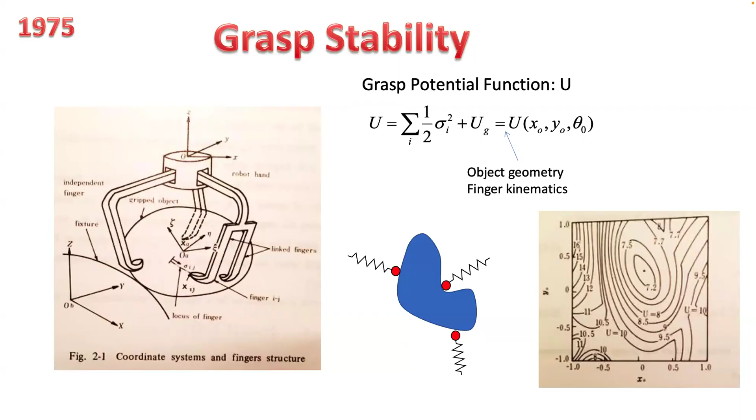If you plot the iso-potential curve, you see a nice local minimum. This is a stable grasping point, which gives a good insight into how we can actually quantify grasp stability. At that time, there was no good way of controlling the force or torque.

So I invented a way of doing that. This is the first series elastic actuator, having a coil spring between the actuator and the load. By measuring the deformation of the coil spring, we can get a pretty good force measurement.

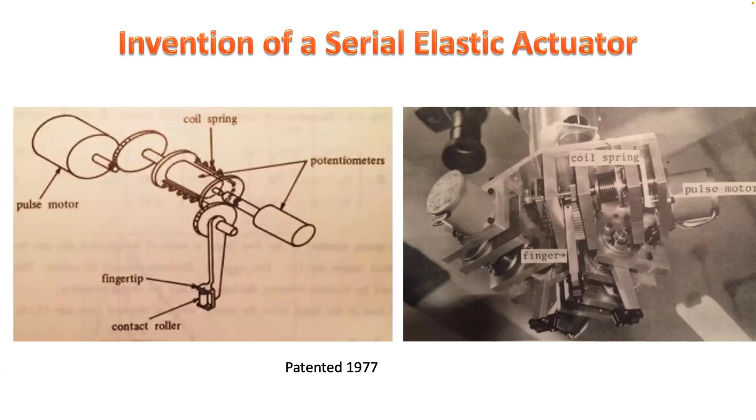After that, when I had the chance to move to the US and got a job as a postdoc at Carnegie Mellon, I found high torque motors just coming out, with rare earth magnets at 42 megagauss-oersted. Now there are much bigger ones, but I knew this was a big breakthrough, along with the high power MOSFETs just coming out.

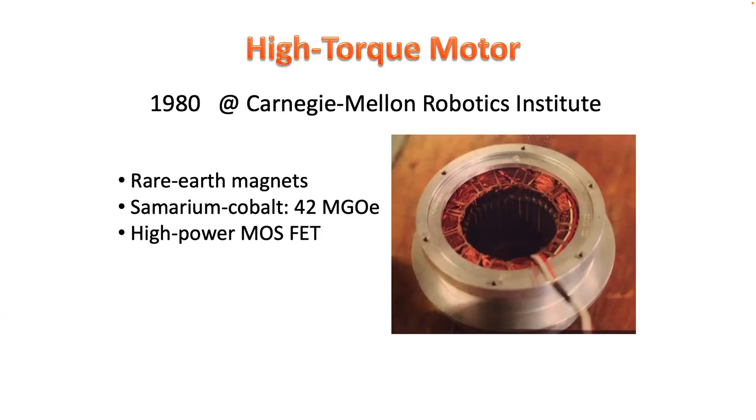These two allowed me to build a robot that has no gearing - the first direct drive robot, at Carnegie Mellon. It was commercialized nicely by Adept, and is still being used in clean room automation, handling wafers.

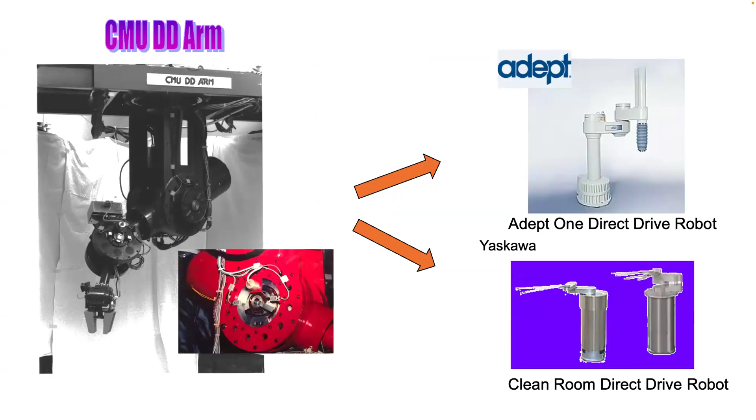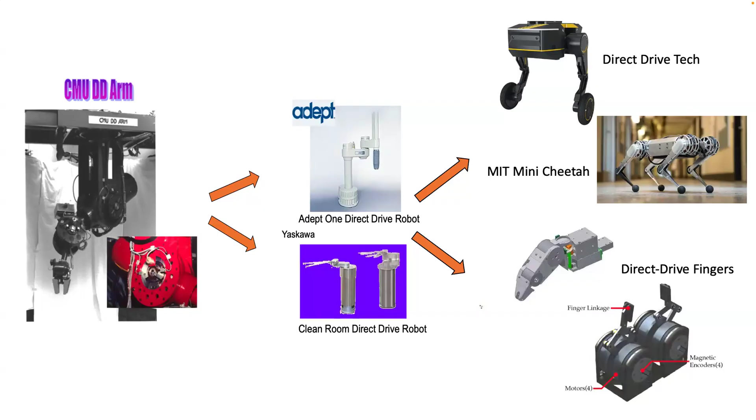Now there's renewed interest in direct drive, but combined with some low gear ratio, so semi-direct drive. The feature is that it's very clean and back-drivable, so you can handle negotiation with rough terrain very nicely.

Also, taking advantage of back-drivability, we can actually detect humans' skills. This is early work with imitation learning, because grabbing the direct drive robot lets you actually show your skills and demonstrate it.

We get the data - both the force and the position - and by analyzing the data, we extract the control algorithm behind that, and transfer it to the robot. People now call this imitation learning. But I think this is very important for me, because my original vision is that you need to understand what's happening, but it's hard to extract because we do this at the subconscious level - we never pay attention to it. So the best way is to observe, get the right measurements, and reveal control algorithms we've developed without knowing it, and use that. That's early work from '87.

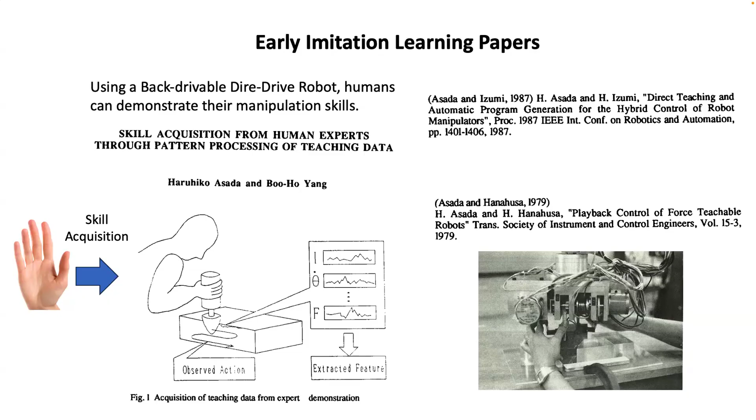Skill acquisition. Then 25 years later, robotics reached the point where it's dexterous enough to do something to help humans.

So I attach the robot to the human body, so you have a third arm or extra limbs on your body. The sponsor for this crazy work was Boeing, for the final assembly process of a big airplane. Most of the work is on ceilings or floors, and it's ergonomically very difficult to ask someone to do that every day, 9 to 5 - it's a hard problem. So maybe we can ask robots to help humans in doing this.

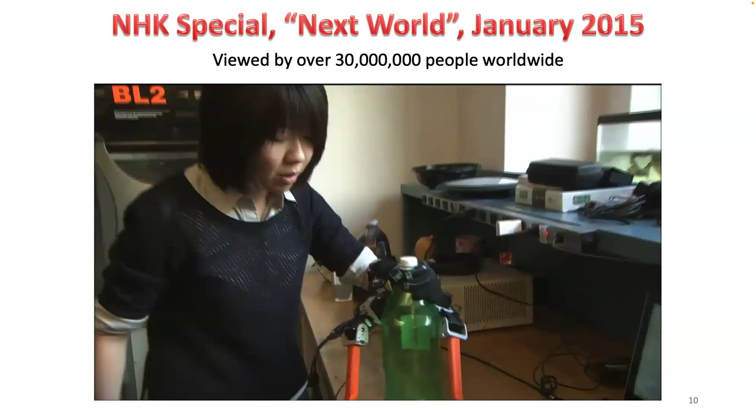Looking at your body, there are many places you can attach extra limbs. The goal is that if you can control it very well and know the human intention, the human perceives this extra limb as just an extension of their body - that is the ultimate human-robot interaction, which I've been dreaming about.

One of the best applications we found is space robotics - here the super limbs are attached to the astronaut's spacesuit. Once you wear the spacesuit, it's internally pressurized, so it's very stiff to bend. So even a very muscular, super athlete astronaut, once they wear that suit, has very limited actions.

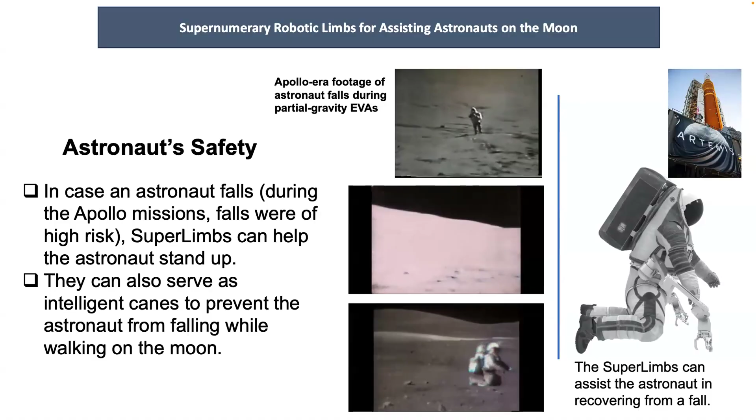In particular, they had to walk on the moon during the Apollo era, and they would all fall. Once you fall, it's harder to get up. So we proposed to NASA to attach extra limbs to assist astronauts in doing this kind of work. This is the newly developed robot arm - we published this recently.

Interestingly, studying the astronauts, we found a very similar problem in elder care. As people get older, their physical strength and bendable angles shrink, their eyesight gets narrower, and their balancing capability declines.

Elderly care is so important - elderly people everywhere underestimate the risk of falling, and then they fall. But also they overestimate the risk of falling, so they stop exercising, which increases balance problems, and then they fall. Either way, there are 37 million fall cases - 1 out of 4 US adults 65 years or older - this is a major issue. So we built a robot to assist with that kind of stuff.

This is a Tai Chi assist robot. We have to encourage them to take more exercise, but a safety net is needed. This robot has to move together with the Tai Chi, which is slow, so it's not difficult to support - that's something interesting we've done.

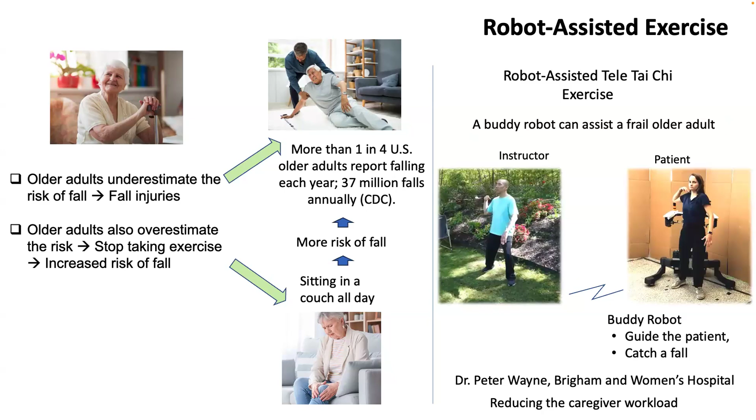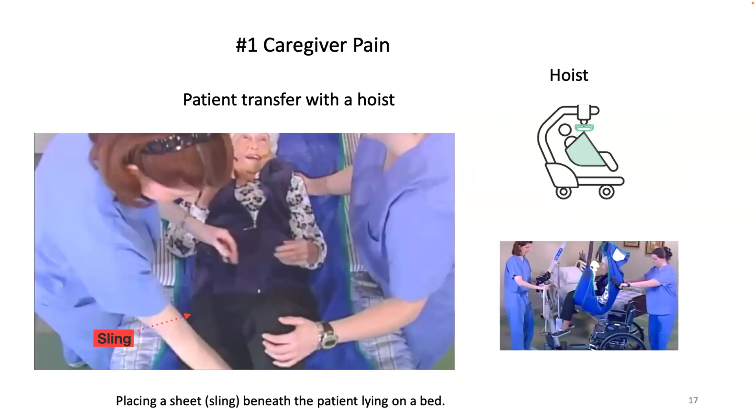Tai Chi saves caregivers' effort, but the hardest part, when you interview caregivers, is transferring the patient from bed to a wheelchair. This is hard because before, using this kind of cradle, you have to put in a sheet - and who's going to put the sheet? That's an enormous effort.

This is a collaborative job with Allison Okamura at Stanford. We built this kind of special robot that goes beneath the human body lying on the bed. Once you spread the sheet, it's easy to carry, and this one can extend in many directions.

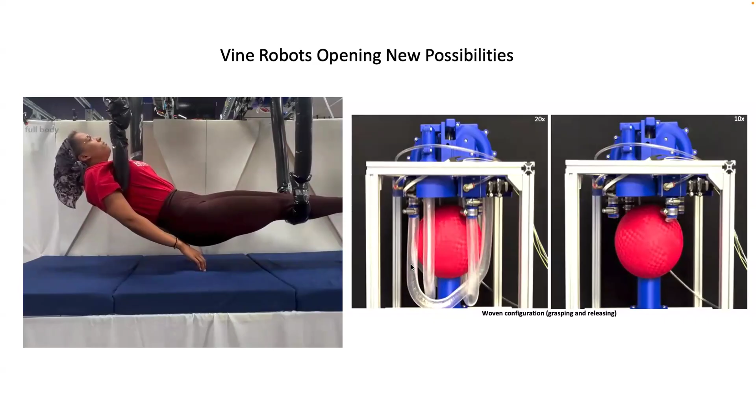So VineBots - I think Laura's somewhere there, actually - agreed with me that it's so flexible it can deal with very unusual types of grasping, and even a human can be lifted. It's quite powerful - that's what we've been working on.

Up to this point, I think I'm convincing you that robotics is quite rich. Any questions up to this point?

Are you okay doing this?

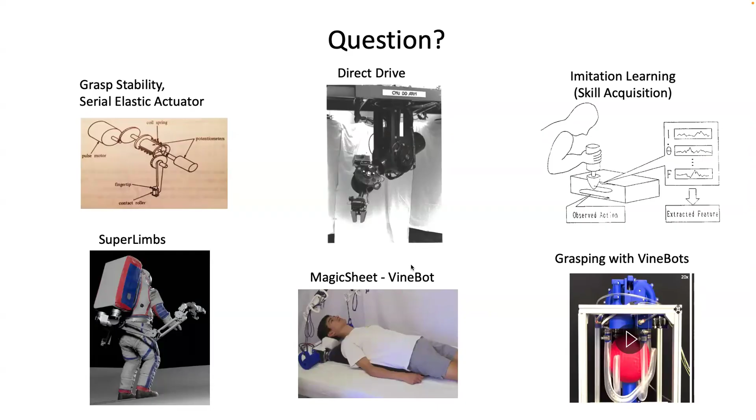Okay, let's move on. So the main topic today is actually not looking back, but it's 2026, and we have a big challenge from just the big data things. So I'm going to talk about the Koopman and global linearization. This may be a method.

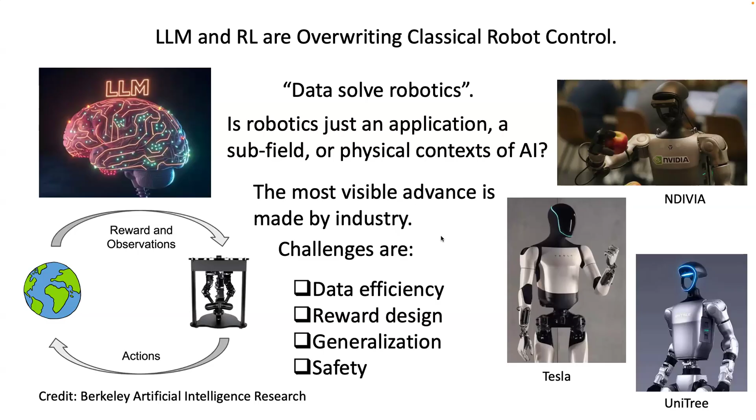I know it's a little hard to compete in the industry in that way. So let's think about a little bit actually bigger perspective. What comes out after this era, and that may be our role as in academia. So it said that this is the equation of motions and the assumption needed. But just using this mode of representation, treating the robotics in that way, may end up with some of the fundamental difficulties, and that's where we are now.

And also, as I just showed, the neural net-based representation too, having some kind of difficulty, and then things are very much brute force methods in many ways. Although it shows very flashy videos, in fact, it is very much improved. Very fascinating things are happening. Maybe it's time to think about the third method, at the representation level.

This guy is the differential algebra-based method, neural net based method. The third method I like to talk about is composition operator-based representation. And in the history of control, once the control community gained a new representation method, like state space, boom, there's so many actually big findings created. So it may be worth doing to find something different representations.

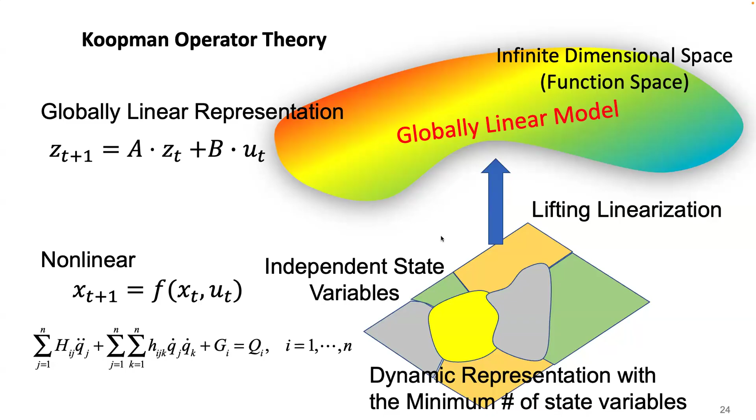Also interesting to note is that in many cases in robotics, we have to deal with switched systems. Some dynamic equations work only in this region. Once it's going to other regions, we have to use a different one. But using the Koopman operator theory carefully, we can actually get a unified representation that's applied across the whole segmented regions, and get one equation that applies to the whole space.

So this particular part is most important to me because the hard robotics problem is in many ways connected to the switching nature or hybrid nature of the dynamics, right? Because the robot actually interacts with the environment. So having a contact here, the dynamics of my arm is different from just moving it through the air, or walking, then one leg - contact situation, it's an open kinematic chain. Once you put the next leg, it just goes to a closed kinematic chain to some fundamental changes in your dynamic equations occurring at this point.

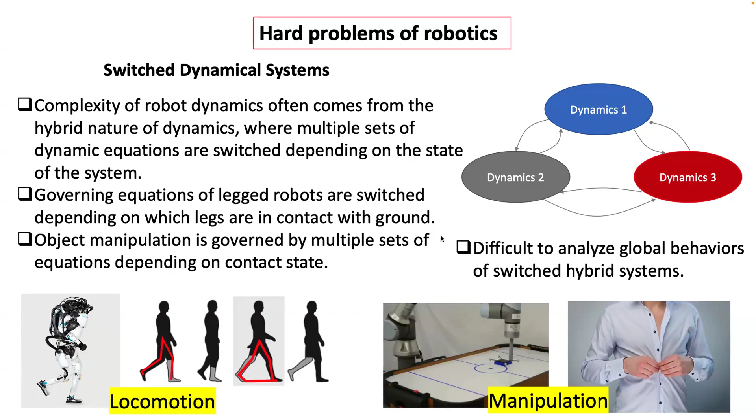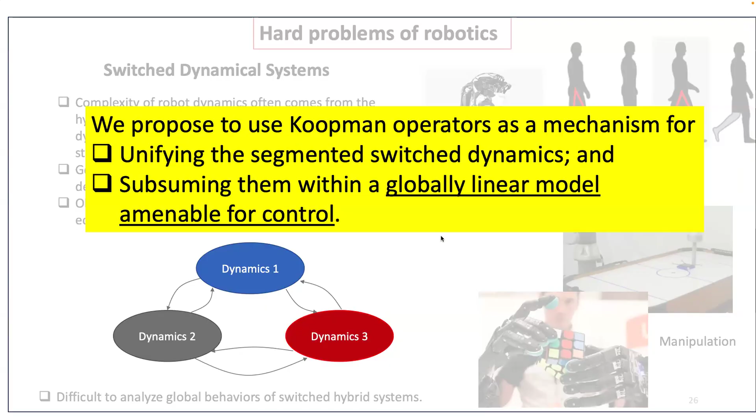So how can we actually deal with such challenging switched systems in a unified way? That's a very important point. So we propose to actually use the Koopman operator as a mechanism for unifying otherwise segmented, switched dynamical systems, subsuming many different dynamics into a globally linear model, which is of course amenable for control. So that's the goal. Actually, switched systems, hybrid systems, having so many research works.

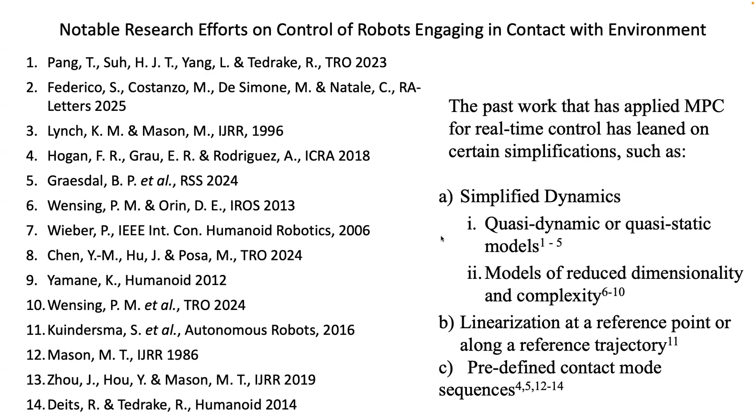This is only in the robotics community - so many great works have been done, I know. However, this is really a hard problem. So they have to take some kind of simplifications - dealing with quasi-dynamic or quasi-static models, or reduced dimensionality and complexity, or linearization at the reference trajectory or point, or a predefined contact mode sequence that is assumed. I'd like to remove all these things and then create a new methodology in representation based on the Koopman operator.

So we focus on the switched dynamical systems, and then we make adjustments to the original Koopman theory, so that you get Koopman compatible physical models. In doing so, we had to deal with discontinuity and causality issues. The original system is not applicable to control systems, so we have to make it control coherent. Once you get the linear model, we apply linear MPC, which is a convex optimization, but very quick to compute, and applies to a variety of applications as listed here.

Even just looking at the simple sit-to-stand motion, a human actually switches between at least 3 or 4 different modes. At the end, we stand up and stabilize the system, which is actually a feedback controller. Before reaching there, it has to go through different modes. But you never notice the switching of your controls. There may be some different way internally of building the model and perceiving the balancing stuff, so we'd like to discover something beyond that.

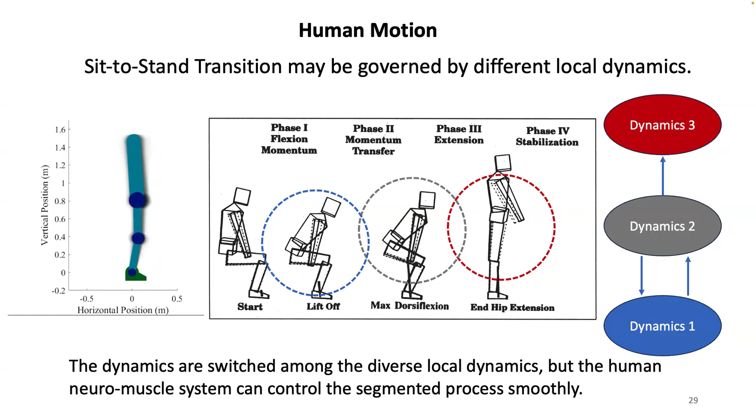So I'd like to just introduce Koopman theory for folks standing there who haven't studied that. I gave my students this as Bernard Koopman's original paper, vintage 1931, and they don't understand it. It says a nonlinear autonomous system can be represented as a linear dynamical system in an infinite dimensional space, and only high priests understand that, but normal people don't.

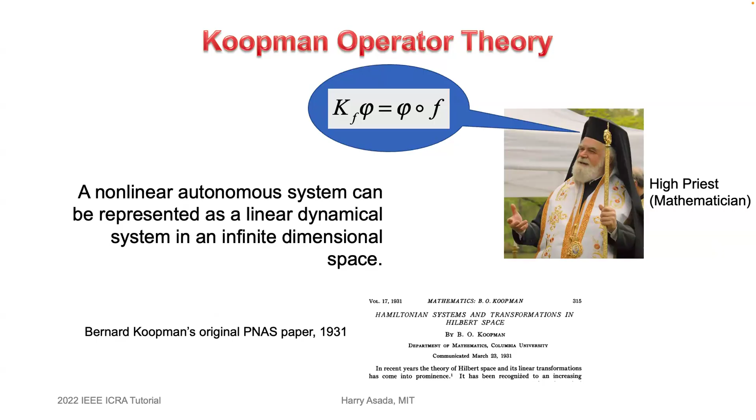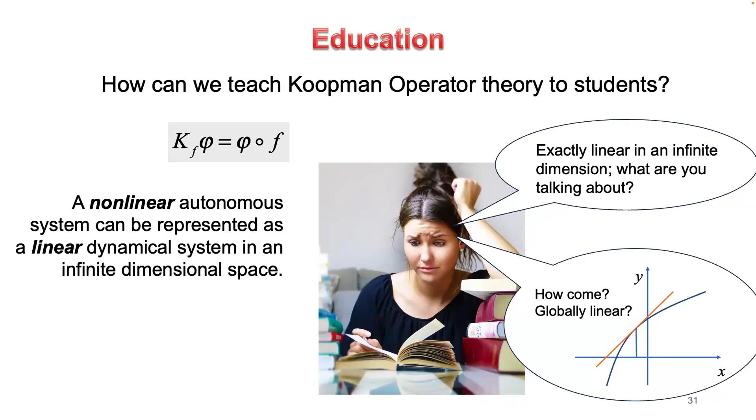So students asked, how come it's globally linear when linearization is just picking a point and drawing a straight line, so it's valid only in the vicinity, right here? So exact linear in infinite dimension - what are you talking about? So they are not happy. I just make a big smile so everyone understands. That's a quick 2 or 3 minute introduction that is simple to understand.

So we start with the autonomous system, no control, a nonlinear dynamical system in discrete time. The state xt is an n-dimensional state variable, dimensionally mapped to xt plus 1.

Now for this we consider orthonormal basis functions, phi i. We need an infinite number of basis functions that span the whole Hilbert space. Consider the composition of this basis function with the dynamic equation f, self-map F - we replace xt by f(xt), which is on the same dimension, putting it here. This means the composition of these two functions is written as phi small circle F composed with the functions of xt. If this composition of functions is involved in the Hilbert space, then this function can be expanded into a series of orthonormal basis functions.

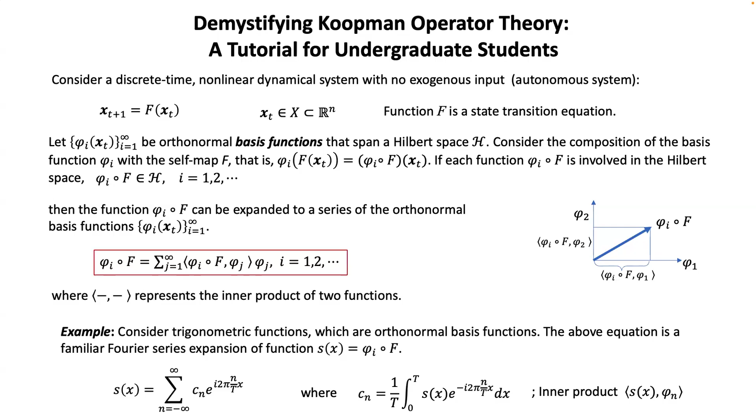The simplest example is trigonometric functions, and it turns out to be simple Fourier series expansion. So you have some function S(x) that is expanded through a series of sine, cosine, or exponential functions. Cn is a coefficient which can be represented as an inner product.

Now the trick is this - this is the equation I showed you. This function can be expanded into this form, so these are basis functions, and we have an infinite number of them. Let's put this into an infinite dimensional vector, phi1, phi2, creating this kind of vector. This vector is multiplied by this coefficient, which after computation is just one coefficient. Let's put it as Aij.

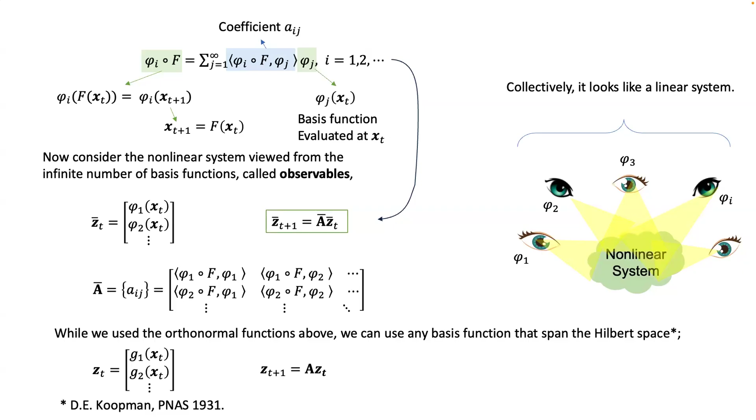I just use the orthonormal basis function, but phi i can be extended to just a general basis function that spans the Hilbert space. We get this as a simple extension. We get this expression, and zi is basically these observations. We call it observable. An infinite number of observables can be placed in this way.

Now, so that is the case where we have no control. The original Koopman theory applies perfectly. However, our interest is to put control here. And then actually the original Koopman theory is not applicable to the control system. So what's the point? It's not applicable.

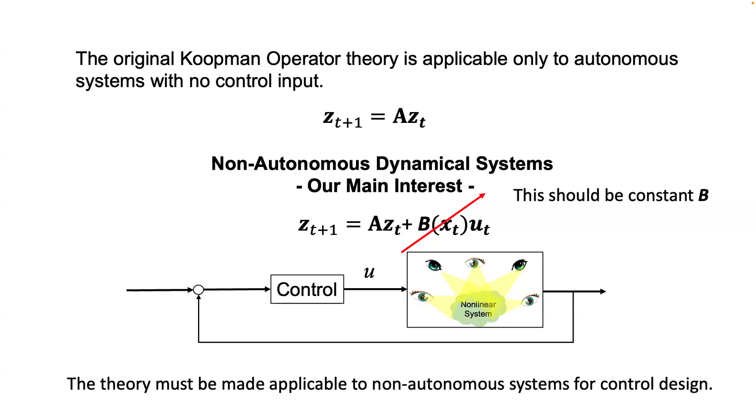However, this is one we extended recently, so that this particular part is actually a constant B matrix times UT. Otherwise, it's mostly a state-dependent B matrix, which is not so friendly in control design. So this is one extension we have made, and the trick is very simple.

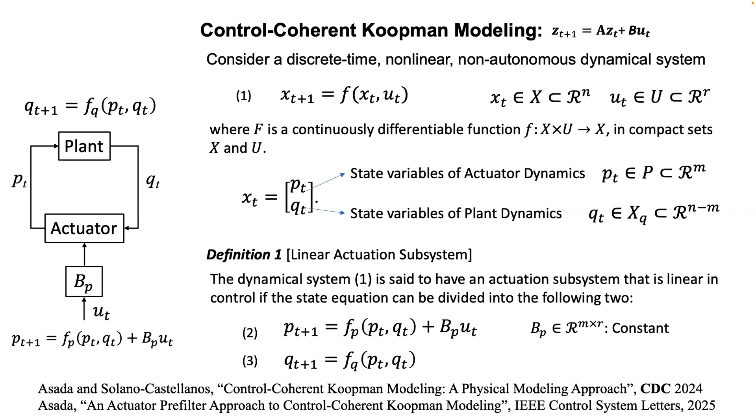All that part is nonlinear. The Qt is actually a plant state, and that's a highly nonlinear part. And here too, it's nonlinear. But as far as this guy is involved linearly, we can actually reduce that one into the Koopman form. So this is the outcome we can get, and the B is actually represented by this.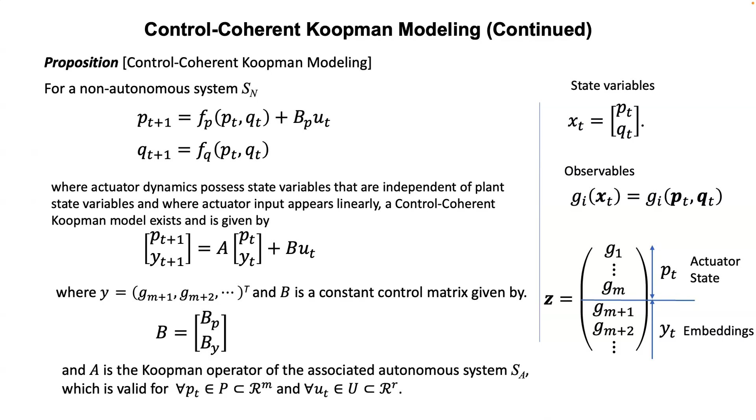So obviously, if you have this kind of structure, you can superimpose this guy in some way. So first you forget about this, you look at only this part. And then this is nothing but just a standard Koopman operator program. You create the Koopman operator for this, and then basically superpose this one into that. Well, that is something easy we can find.

So P bar, Y bar basically includes all the observable functions, and after this, after P, you get the standard Koopman operator. Now, one issue is that...

P plus one, this is without actually control, so we can add the control into this part. But maybe another very subtle point is that Y is also a function of P and Q, and then this Y bar is actually the original P, which is used in the autonomous system that doesn't have the control input in it. So there's a kind of gap between YT plus one, which we want, versus this guy. And then here the YT plus one, we have to modify PT plus one with some new input that comes in. So we need some kind of corrections we have to make.

Assuming that the time step is small enough and the original system is continuous, we can actually approximate this. So beyond this point is approximation. Approximate this to this form. So delta P is nothing but actuator dynamics with and without control input. So the difference is the control input. So nicely, this times this is actually linear.

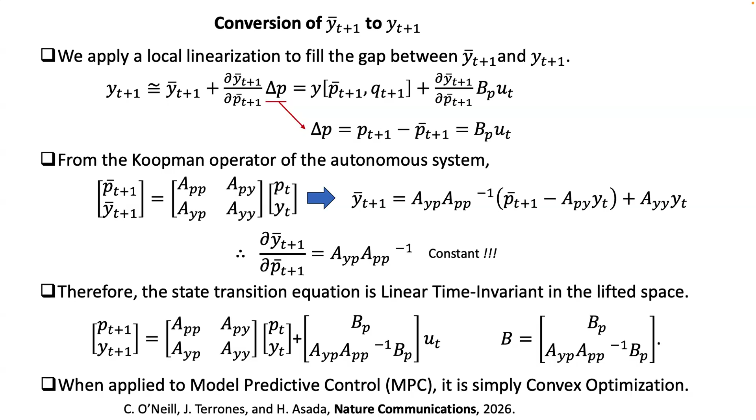This guy has complete derivations, extensions of the Koopman theory, two linear time invariant systems. We call this control coherent Koopman operators.

We found this particular form can be applied to many systems having a little bit of gearing compliance, like harmonic drives, where the actuator side state and load side state possess independent state variables. Same thing applies to hydraulic systems and biomechanical muscle systems having some compliance in it. Even if you don't have any compliance, like a very rigid system, we can create such compliance through some filter. This is the pre-filtering approach we just published.

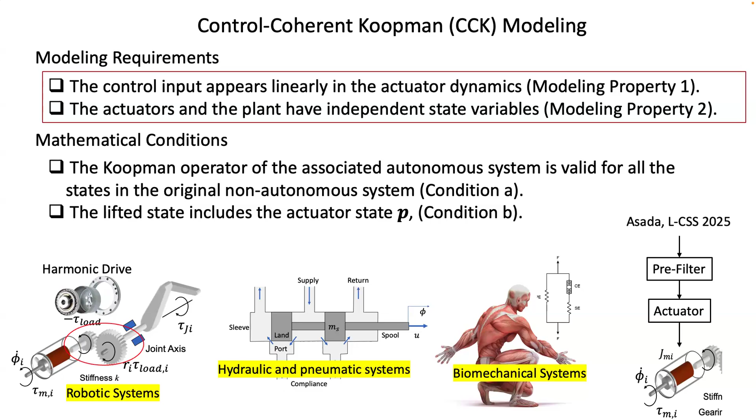This one has no constraint in it, so this approach can be applied broadly to a large area. You have to check that the control input appears linearly in the actuation dynamics - that's the first property. Then actuators and the plant dynamics must have independent state variables. So these are the things we have to do.

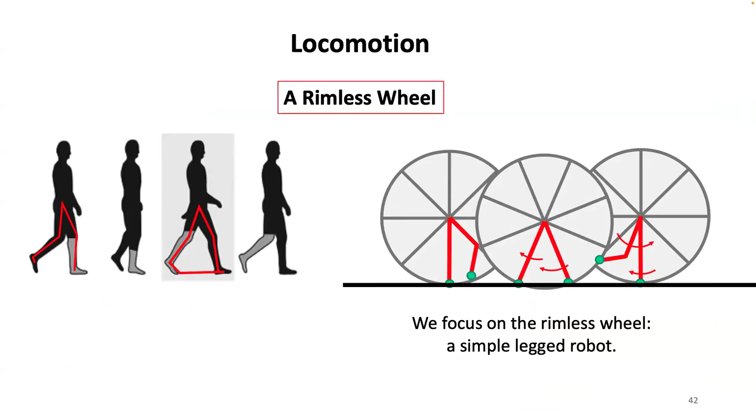Now let's apply this to some specific areas of application. The first one is a rimless wheel - this is the simplest model of human gait. So you have the hub of this rimless wheel. We built a kind of rimless wheel with 6 spokes, and each limb's length of the bodies has actuators. To locate this, we need 3 generalized coordinates: x, y, theta. Also 6 independent generalized coordinates are needed for spoke lengths.

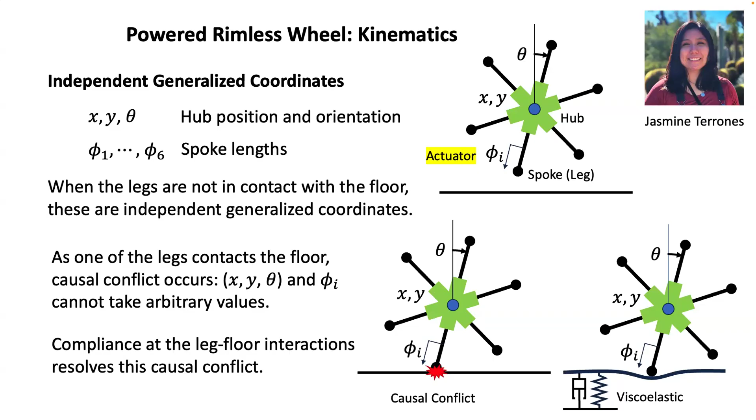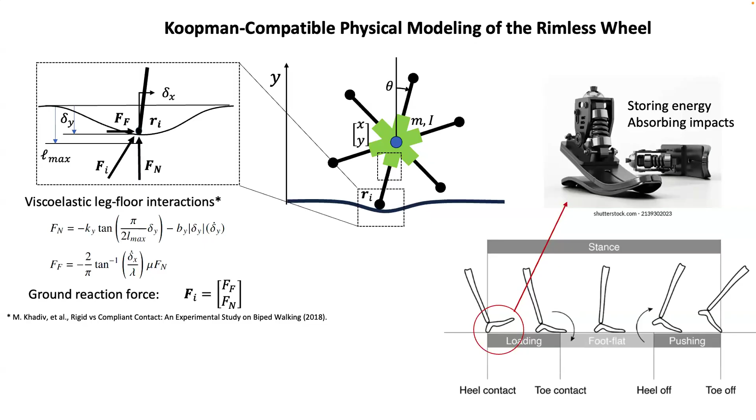However, once this one is in contact with the floor, a causal conflict occurs - x, y, theta versus these are not actually independent. So we have a causal conflict. To resolve that, we can consider some viscoelasticity on the floor, and this is natural in many cases, like gait robotics, which actually builds many complex models of viscoelasticity. We pick just one of them. We can say some limbs have this compliance intentionally to improve performance.

Once we have actuators, having some simple stuff like a linear actuator, look at this dynamic equation. It has the motor rotor inertia, and they're basically constant inertia - I wrote it here, IM is the effective inertia around the motor axis. This dynamics is highly nonlinear, but the input U created by torque is linearly involved in this dynamic equation, meeting the requirement I said - state variables independent, and input linearly involved.

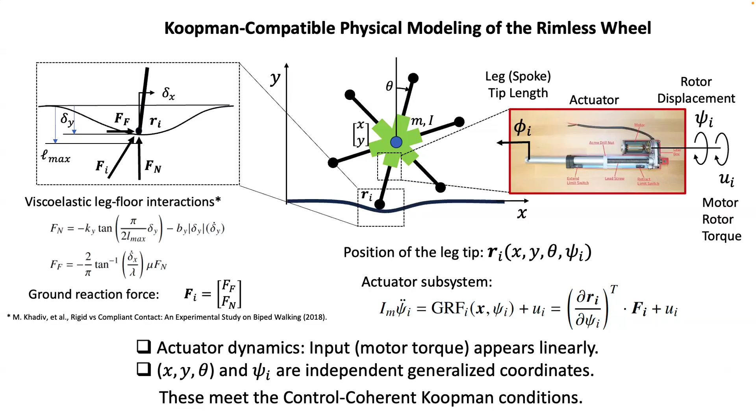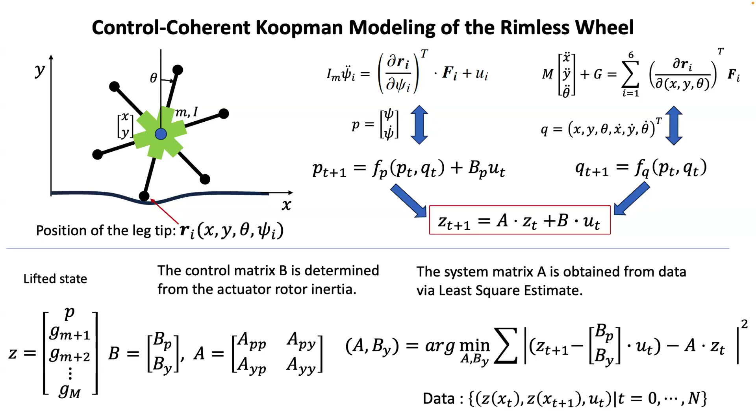So we can apply the Koopman operator theory to this. Once you have it, you can get the linear model, and matrix A is determined from the associated no-control autonomous system models. You can use the data-driven method or model-based method or whatever, and then B can be determined from this, or using this you can determine it analytically. So that is the case.

Now that we get the linear model, we apply MPC - this is the control index subjected to the linear model over here. So we can guarantee a convex optimization with fast computation in real time. The good thing here is, as I said, this is a switched system: one leg is airborne, then one leg is in contact, and instantaneously two legs are in contact, so dynamics must be switched.

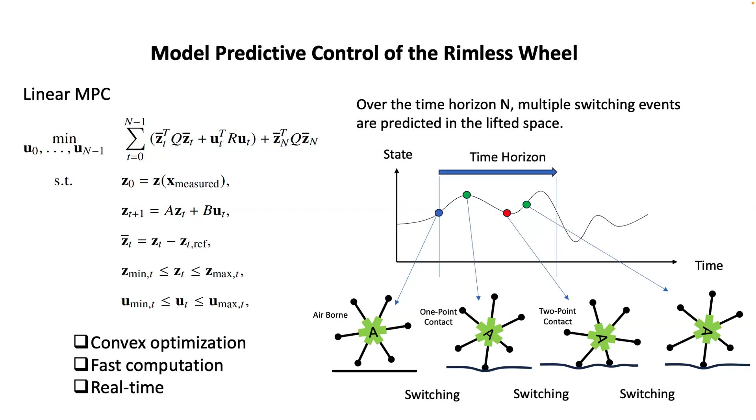However, the Koopman model includes all of these cases in one model. Looking at the time horizon, sometimes it's airborne, but now 1 point of contact, 2 points of contact, 1 point of contact again - this Koopman operator basically looks at the whole switching sequence down the line. So this is some simulation done by my students.

So this rimless wheel found some way of moving forward. And interestingly, before touching down, it contracts, so it bends more, and then pushes harder to get more traction moving forward.

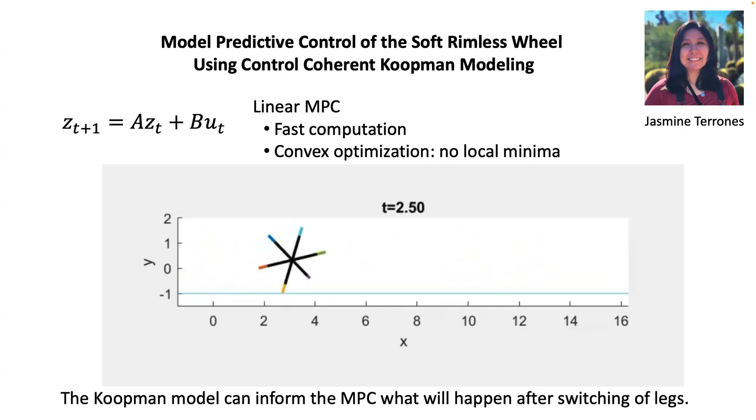And I have to emphasize that it can get global linearization. The region is divided into 3 regions: airborne/no contact, 1 point of contact, 2 points of contact, and the switching is very tricky. But see the current state over here - it's very close to this border. In a traditional model, if you use the traditional approach, it has no clue about what's happening after crossing the border. If you take the Taylor expansion at this point, there's no information about that point beyond it.

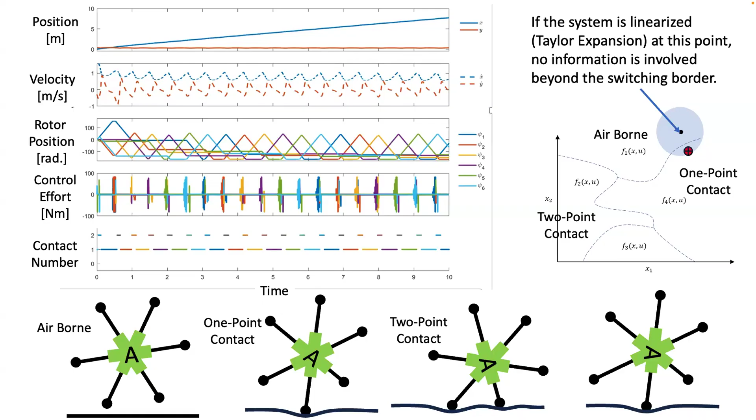Koopman basically takes the whole information in high dimensional space, so it covers all the stuff nicely. Of course, this means you have to have a certain time horizon to cover, and if the time horizon is very short, it doesn't work well. So as shown here, this guy is struggling and can't actually move forward. With 10 time steps it's sometimes okay, but sometimes it comes back and isn't very reliable.

Extended to 20 time steps forward, it goes very stably. So it does actually need a far-reaching point of view, and after many multiple steps later, where is it going? That's actually needed.

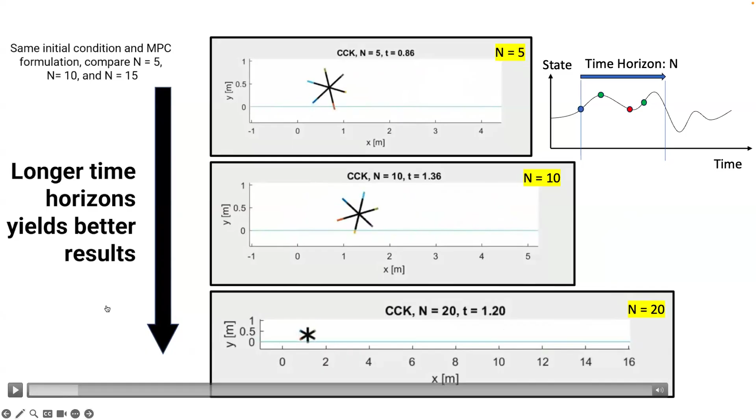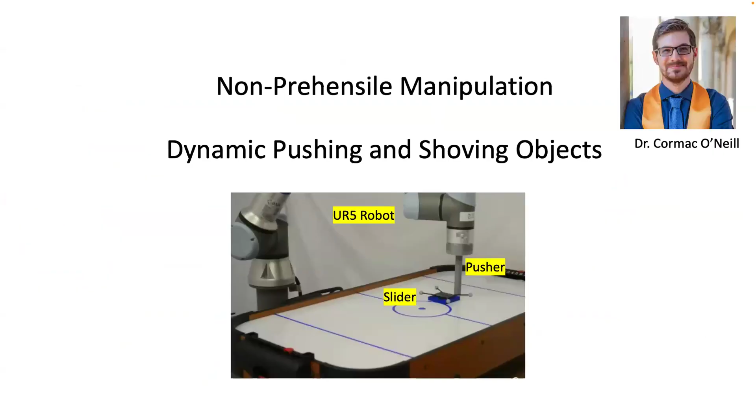So yeah, that's this rimless wheel story. Even more interesting is this dynamic pushing and then shoving. This is a very good classical award-winning paper by my former colleague Alberto Rodriguez.

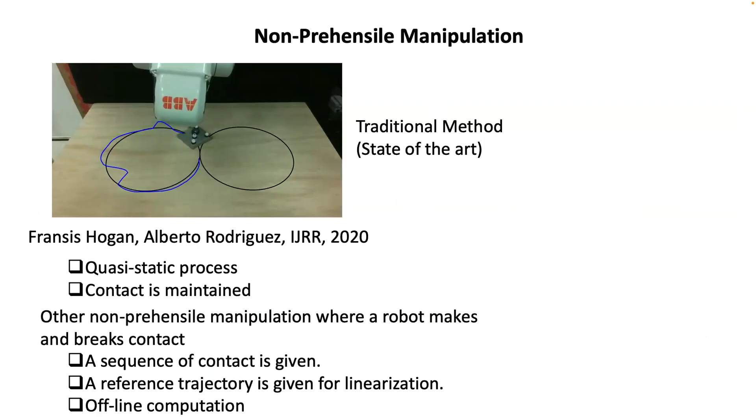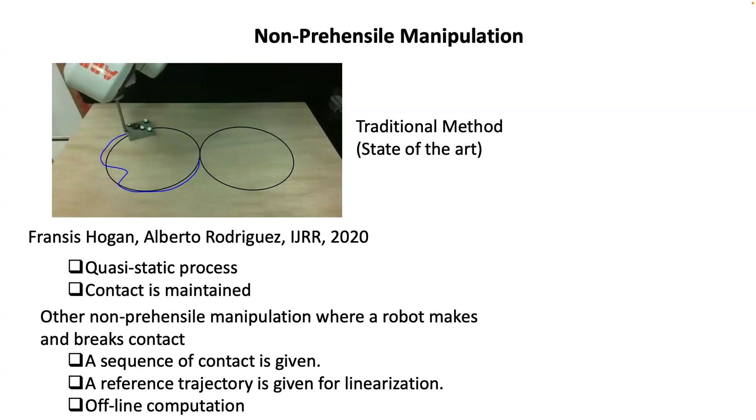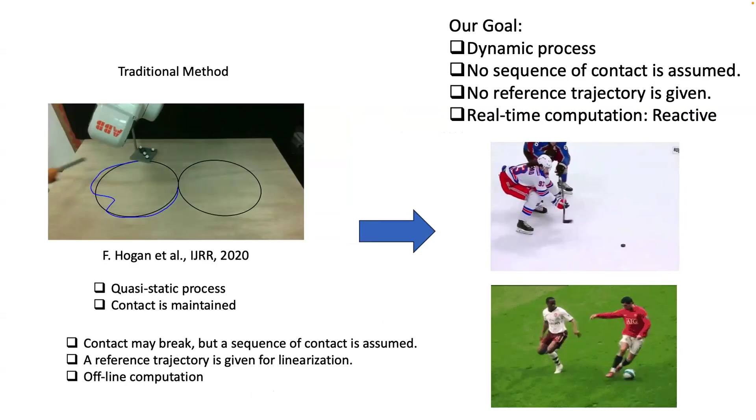It basically makes this pushing control assuming the quasi-static, contact is maintained all the time, with more restricted constraints. But this is what we like to do, right? Like so, the process is fully dynamic, no sequence of contact is assumed, and no reference trajectory is given. It's reactive and real-time computation.

Now look at this slider, the puck. We need six-dimensional state variables, X, Y, and the rotations. These two we want to make independent. Well, when they're not in contact, that's okay, but in contact it's basically conflict occurred. So we introduce some compliance, some pusher compliance into this. With this we clarify the requirement for Koopman operators, and then we build this model.

And then for actually finding the observable functions, we use a neural net. This is now the standard technique in the Koopman community, and we use that and put it into this robot.

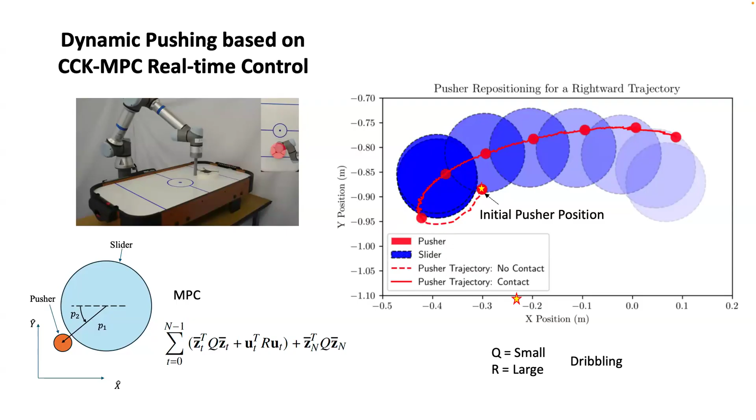Here's the puck, a circular puck. Originally the pusher is on this side. We like to move the puck to the other side. So first, the MPC has to think about it, change the contact point, move around here, then contact here, and move along this trajectory to move the object to this point by minimizing the cost functional. This is the case here where Q is relatively small and R is relatively large.

Now, interestingly, this is really reactive. So if you disturb it, it can actually make quick corrections and drive it to the target point very nicely, with no predefined contact sequence, no quasi-static assumption, all planning at real time.

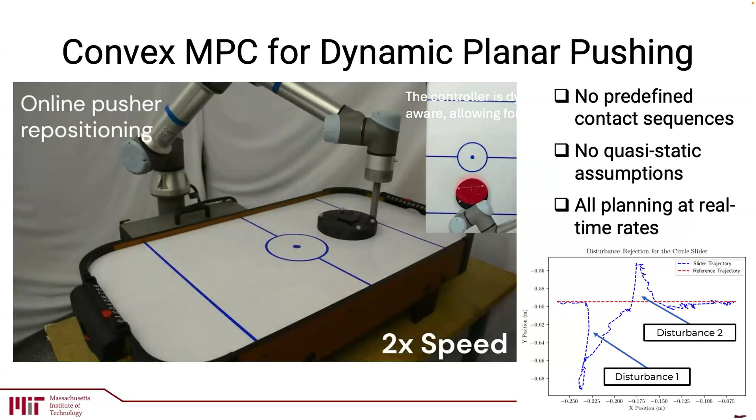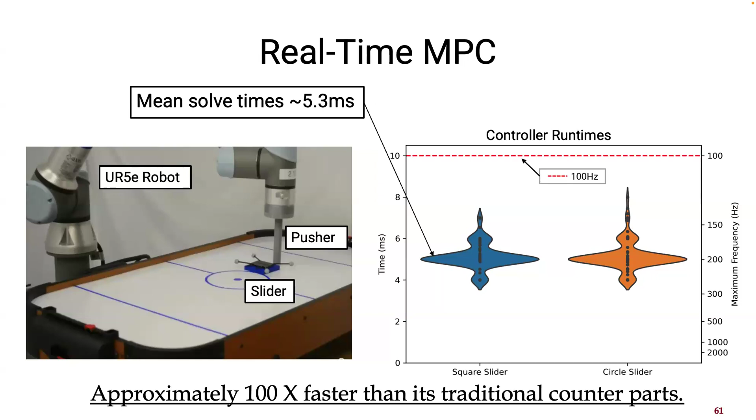Now, this is actually our measurement of controller run times. It's less than 10 milliseconds. 100 hertz is achieved, on average only 5.3 milliseconds. If you compare this to the traditional method, basically mixed integer nonlinear programming, that takes almost 100 times longer. So a drastic reduction has been achieved with this.

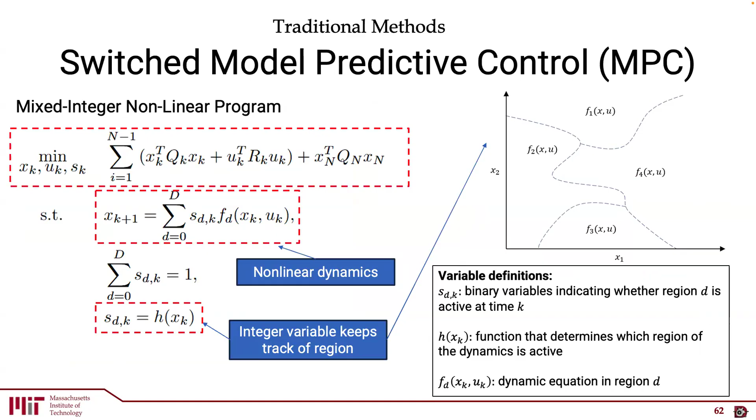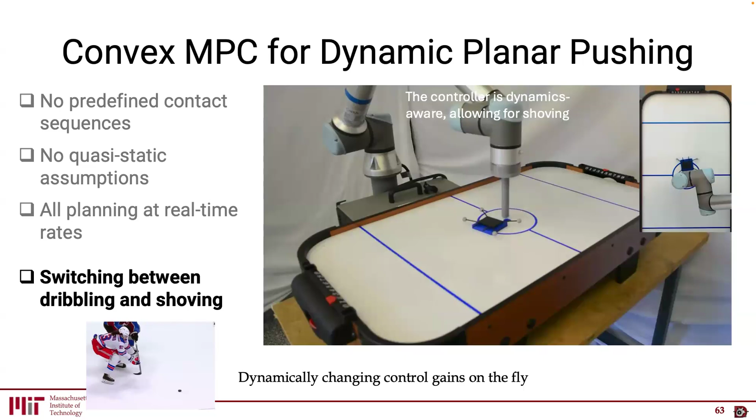Even more exciting to me is the kind of switching between control modes, dribbling and shoving. Just a small change to the performance index, the R and Q matrices, and the system can find the appropriate actions on the fly.

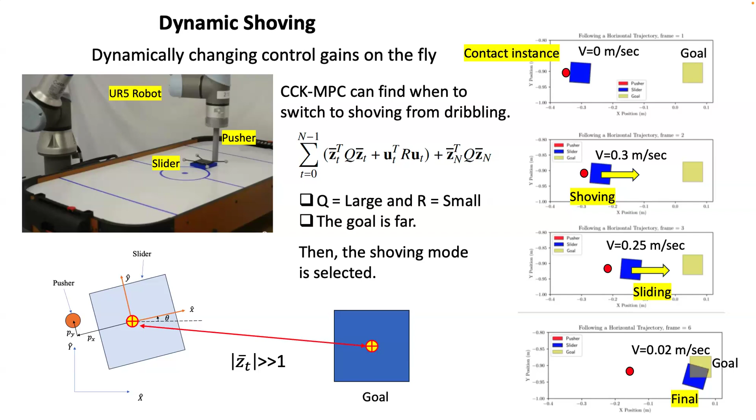So this is a case where Q is slightly larger and R is small, so larger control effort is allowed. Then what happens is when the robot sees the goal is far, instead of dribbling the object, it does a kick shot. We didn't do anything but just change the control policy a little bit, and it's seamlessly implemented and executed here.

In the parameter study, a few parameters are very important, and usually Koopman is very sensitive to parameters. The coefficient of friction is one of the most important parameters. If that's correctly estimated, you get very nice dribbling, boom, boom, boom. And if it's wrongly estimated, the real friction is much lower than the estimated one.

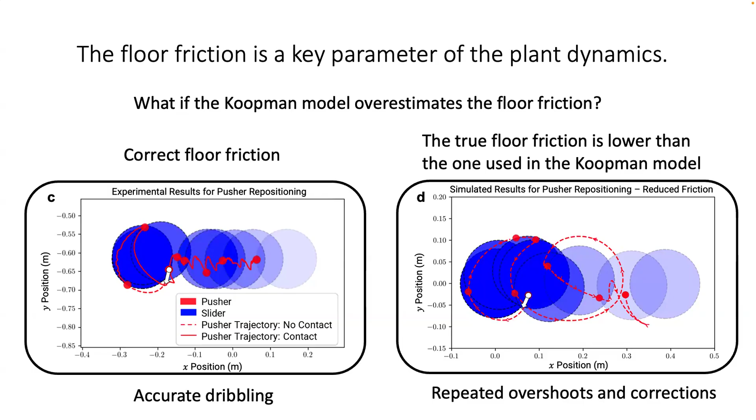It will overshoot and go this way and this way, but because of the feedback, it can actually handle this. Now, it is nice to incorporate the friction into this, right?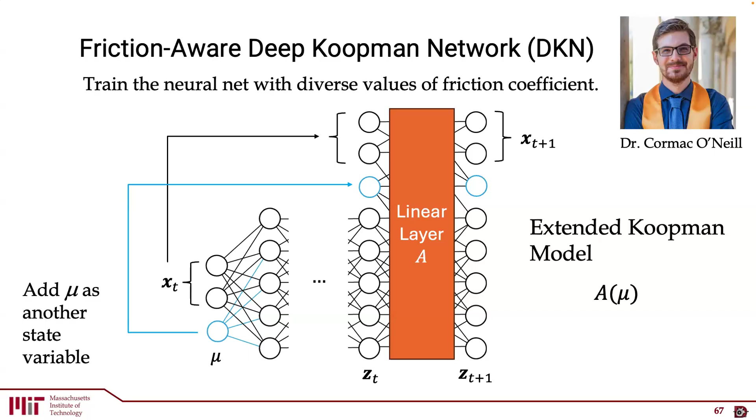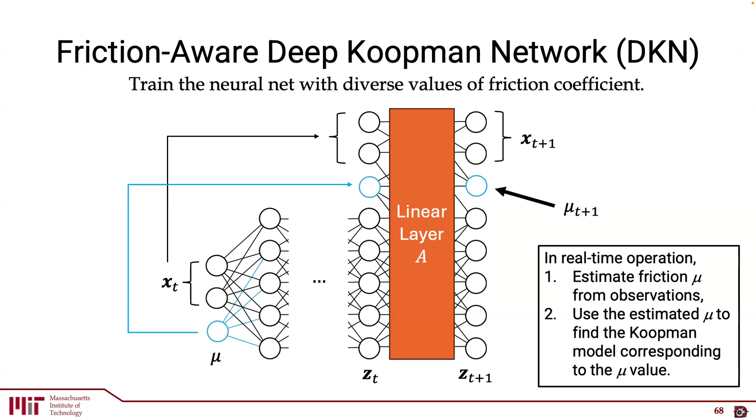So extending this original neural net to represent the basis functions, we talk about observables that can be found using the neural net based on some data. Now, training this, we can put the friction into this additional state of the input and train this, so this neural net knows all the cases for different values of friction. Then in real time, we can estimate the friction value from the real data on the fly, put the estimated value in here, and extract the linear model corresponding to that friction. That makes it much more accurate.

Maybe one of you would ask: what if we put some compliance here, if the pusher stiffness is higher? Maybe I'm cheating a little bit by putting in some compliance. So it's a valid question, what happens there? What if the pusher is very stiff? Does it impact the Koopman prediction accuracy? Yes.

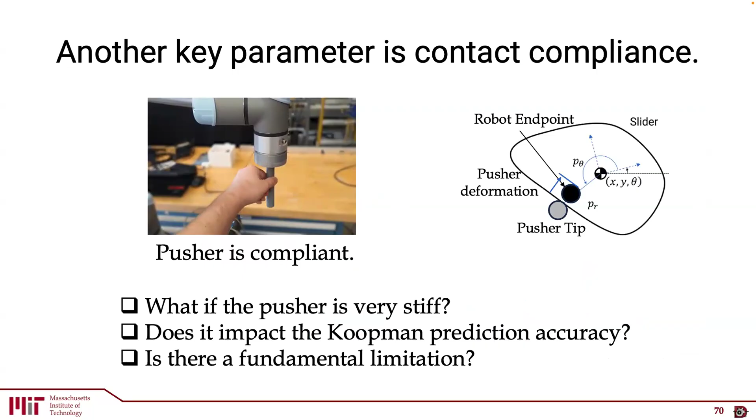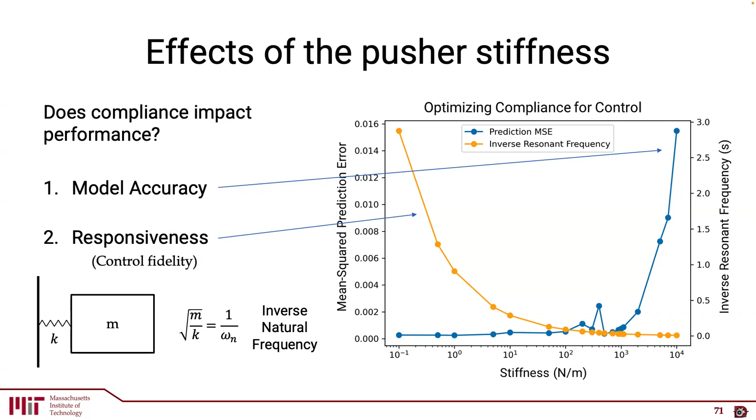So it doesn't work very well at high stiffness. At the same time, if the compliance stiffness is extremely low, that means the system is not really high fidelity control - you have to move a lot to generate the force. So controllability is basically going down, represented by this orange line. The smaller is better, so there's some kind of sweet spot somewhere in between.

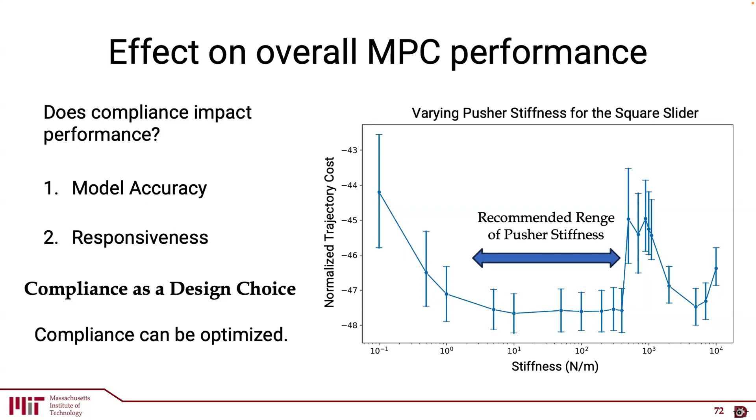Yeah, so that is actually this spot - by taking the two conflicting requirements, we can make a good trade-off. This may be a kind of constraint, but we can take it as an opportunity. Pusher compliance is something that we can design, right? So we can find the best compliance based on the ultimate control performance. Overall control performance is most important, and to optimize that, we can just design the compliance.

So I think I'm running out of time. I know I talked about these two examples - we have some other interesting stuff, but let me just go into a summary.

So the Koopman operator provides a new type of dynamic representation based on the compositional operator theory, and that supplements differential algebra-based state equations or something like this. This is good, but it's not so convenient - you end up with nonlinear systems, and switched systems are very difficult to deal with, let alone this one has some problems. So we introduced this approach.

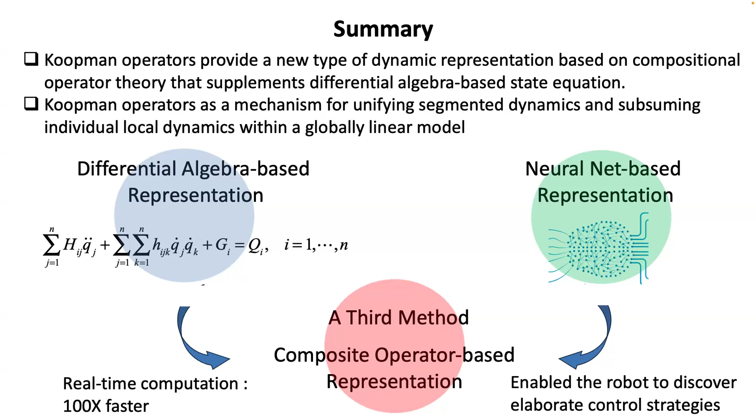Instead of going to this one, this representation gives real-time computation 100 times faster, and allows the robot to discover and do quite elaborate control - predicting how many steps later it's going to be good or bad. We can actually predict that.

So this is my team. I love to work with these talented young people, and we got this funding source.

This is something interesting I would like to share with you, some future work. So I think football is very important to Purdue, right? Am I correct? I can't get the ticket over here. So looking at the wide receivers, purely athletic, one hand catch - it's really amazing. The human has 200 degrees of freedom and 600 muscles.

How can one control and coordinate 600 muscles? Yeah, humanoid robotics is a big breakthrough. I think the kind of robotics textbook is based on the 6DOF robot era, and now we don't have much tools to deal with 28 or higher degrees of freedom. And that's why I've seen many efforts going on at Purdue.

But I'd like to identify that there's a significant gap between humans and the system, and the Koopman operator approach does not scale very well, right? So how do we really cope with the curse of dimensionality?

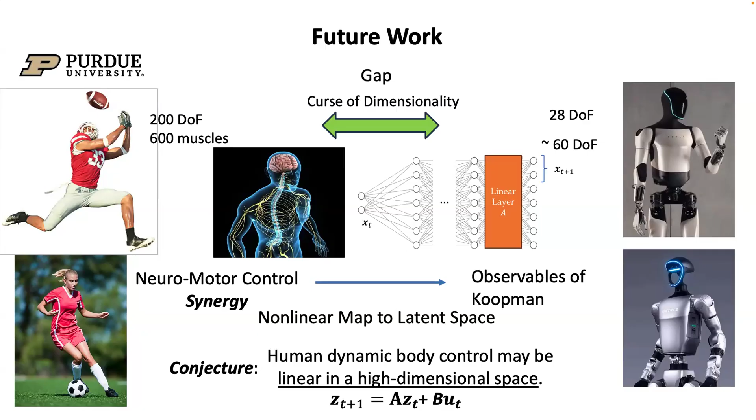I've shown many things I've done, but all the gurus like me have only reviewed some amazing human functions - a small fraction - and there's much more to explore if you look at humans or animals. Look at your hands, animals, and any lifelike activities - they are your textbook and source of inspiration.

Robotics is a rich and copious subject. I don't think data alone solves that kind of robotics, though maybe more localized robotics problems can be solved by data. Let's look at what's going to happen after this era.

Running on the bandwagon is important for raising funding, and I'm not against getting money from there. But for your own academic research and scientific curiosity, your journey, let's look at our own body and what we have inside - there are still so many things not yet discovered.